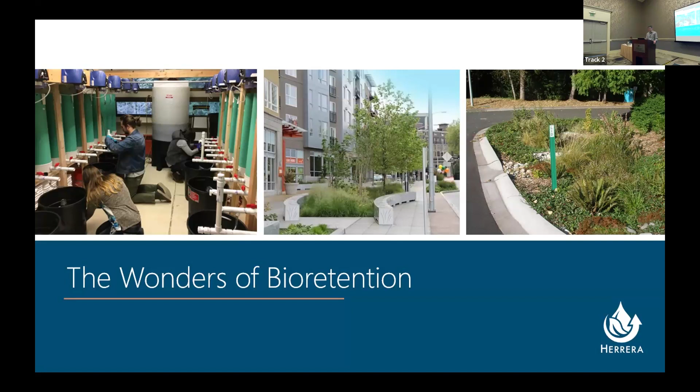We've heard today a lot about how great bioretention is, and we've known this for a while, right? It's very good at treating things like fecal coliform, which is hard to treat with most BMPs. Great for TSS and for zinc, but also cool for placemaking and habitat and traffic calming, all these wonderful things. So of course, our research is focused on bioretention a lot in this region. Turns out it's also really good for the removal of 6PPD-quinone. We've seen that in a study presented by Curtis and by Amy as well. Really exciting that all these data are coming out now, and we're going to get into those data.

That's just really bad luck for coho salmon, right? Designed as a plasticizer for tires. It's an oxidized version of that, just happens to be highly toxic for coho salmon. And just how toxic? We're talking between 40 and 90 nanograms per liter is the LC50, depending on the life stage. Converting to the universal units of Olympic-sized swimming pools, that is 40 drops in 20 Olympic-sized swimming pools kills half the coho in there. It's pretty tough.

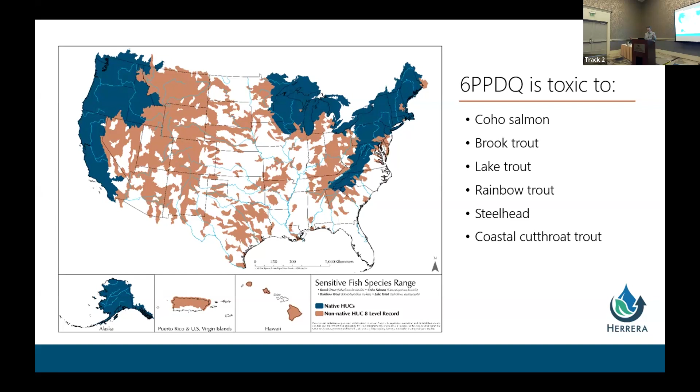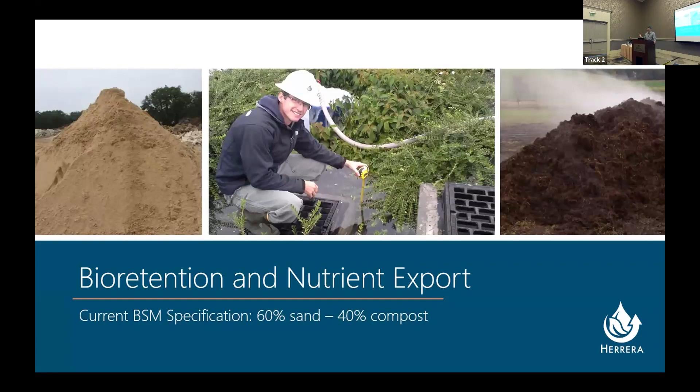Luckily, back to bioretention. Bioretention is pretty good at removing 6PPD-Q. What it's particularly bad at is nutrients, right? That is the standard bioretention soil media spec, 60% sand, 40% compost. We know compost leaches nutrients. That's why the plants love it. But we didn't know the magnitude of this issue until the city of Redmond started looking at it closely because they wanted to treat their stormwater. This is 2013. Everyone wanted to do LID, but they drink their shallow groundwater supply, and wanted to make sure the water is filtered to a high degree before they infiltrated.

But what they documented was with an underdrain in these systems, and I think it's up to 6 bioretention systems full scale in the field that they ended up monitoring, is that there's just a ton of nutrients coming out the underdrain. You know, this soil media spec, 60% sand, 40% compost. If you don't have an underdrain, it's awesome, right? Because you have dispersed nutrients going into groundwater.

That's not a big deal. It won't be too big a loading in any one spot that you'd have to care about it. But when you have an underdrain, you're just routing that straight to a receiving water, right? It's a filter, and especially if it's lined, right? And as we started implementing bioretention across the region with our difficult soils, people started designing more and more fully lined bioretention systems with underdrains. And at that point, it's just a filter.

And really, it's your last chance to get it right at that point. Like you've messed up 100 ways in your basin, you've put in the pavement, you brought in the cars, you brought in the pollution, you routed everything. And now you have 18 inches of soil between you and the stream. It's your last chance to get it right. And so this is what really spawned a bunch of research to get that 18 inches really, really right. We should put some more engineering into that to fix that issue.

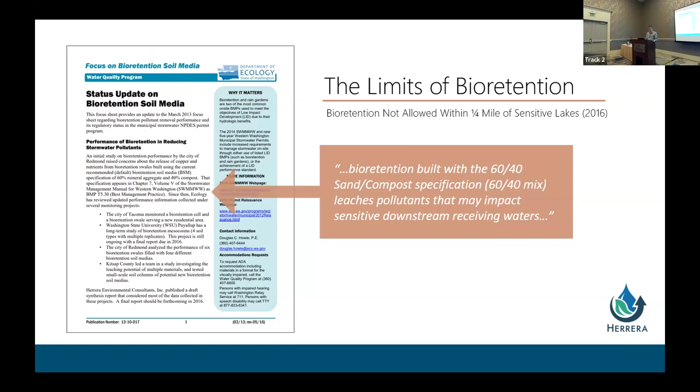When that was documented in Redmond, that amount of nutrient export, Ecology responded, reminding everyone that if you're within a quarter mile of a sensitive receiving water, don't do bioretention. If you have an underdrain, think about it. And then they also looked into funding a number of studies to find an alternate bioretention soil media spec.

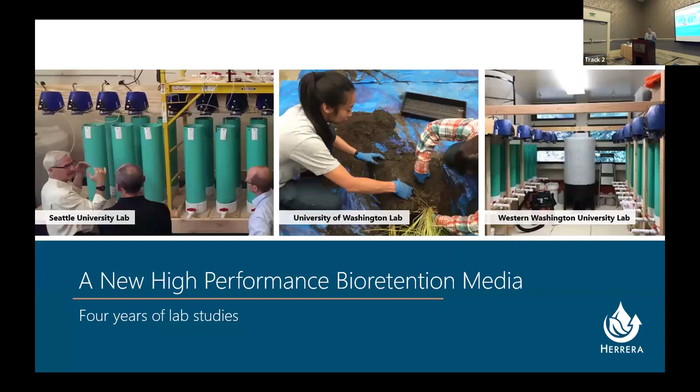And Curtis Hinman led a lot of this work, and he presented some of it today, and the knock-on work from it that's coming up now, but did a lot of studies over, I don't know how many years, Curtis, 10 years, a number of studies, and King County, Kitsap County, a lot of great partners, Seattle University, Western Washington University, University of Washington, all involved, making sure this stuff can grow plants and making sure it can not leach additional pollutants. We got to worry about that. We saw it with the compost.

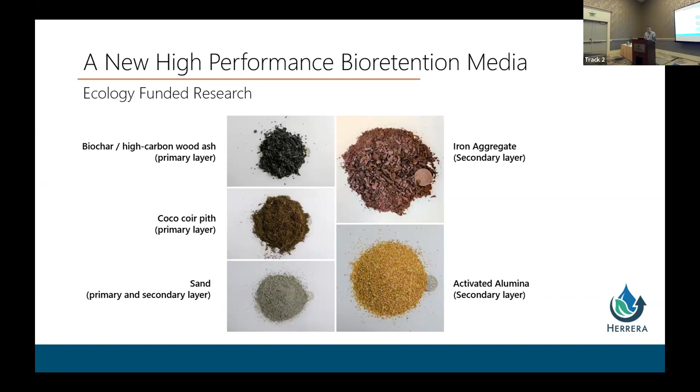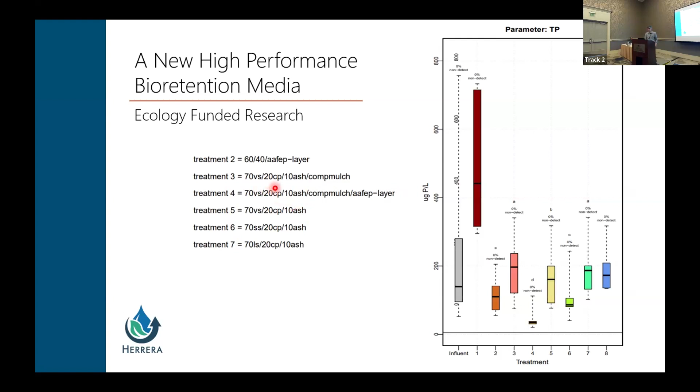Those components. This is some of the data that moved us towards getting this alternate bioretention soil media spec approved, the HPBSM. You can go to Ecology's website and get the spec on that. Meanwhile, in Bellingham, they have a big water body there that they care a lot about when it comes to phosphorus loading. And so, this new spec came out. Now you can build bioretention within a quarter mile of a sensitive receiving water because it doesn't export phosphorus. In fact, it decreases phosphorus a lot. So super exciting. They can start building this stuff along the shores of Lake Whatcom. And that's what the county decided to do.

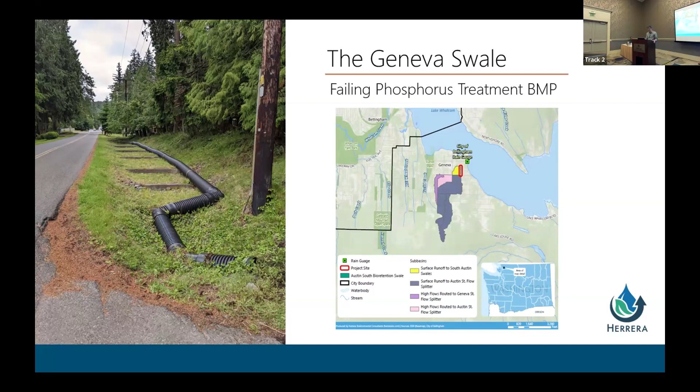It was fouling because there was a lot of baseflow coming in to this system because it's a big pervious basin, so it's like a seasonal stream almost going along the road. And this was causing the media to foul on this existing system. And in fact, they put a big pipe and just routed around the whole thing. So it was offline. And there was an opportunity here to retrofit this thing and improve it. So that's what we did. Those are those problems listed.

And redesigned it as a regional facility using the HPBSM. At this point, this is one of the first installations at scale of this new media in the field. It had been tested and proved in the lab. So we got an SFAP grant, and so again, thanking Ecology for that, to have this rebuilt. Lined it and put in the HPBSM, put in a dosing siphon with flow distribution. That was a pretty cool thing about this.

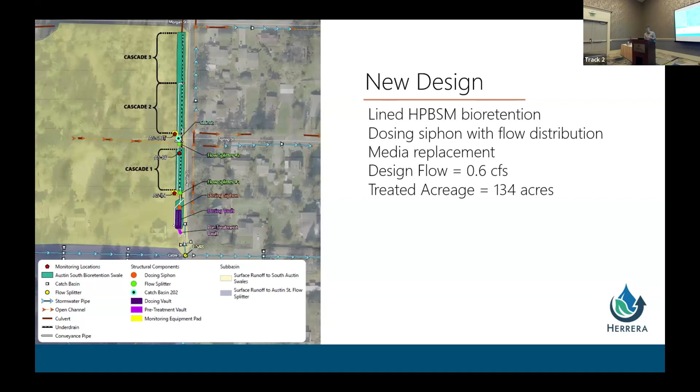Inherent problem with regional facilities is it's always baseflow coming in because you have these big basins. And what do you do with that? If you try to put it through a filter, the filter's wet all the time and bad things happen. If you route it around, you're not treating any of that, right? And there's phosphorus in groundwater, and so they care about treating the groundwater. So our solution for that here was this dosing siphon, and we'll get into that. Design flow is 0.6 CFS, 134 acre basin.

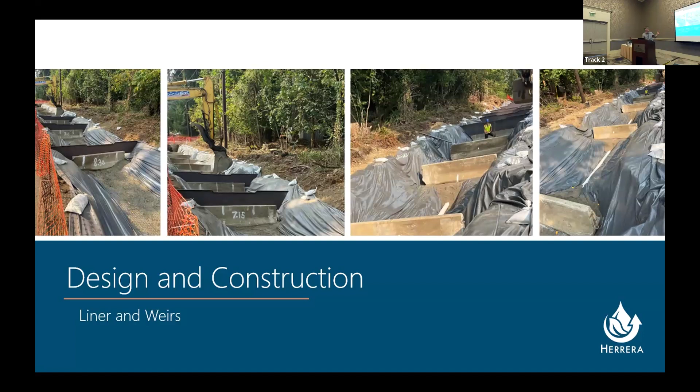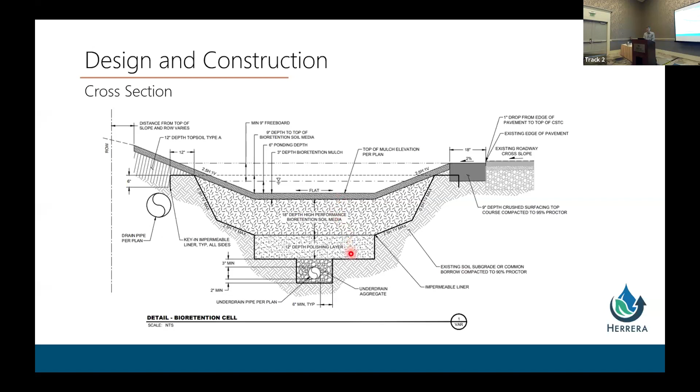This is what it looked like under construction. It was sort of a somewhat steep street. So we put a bunch of check dams in, Jersey barriers that we bolted some metal onto to flatten it out. So a whole bunch of tiers lined the whole thing. There's a cross section, the main media layer, and then the polishing layer underneath, layer cake.

There's a picture of the dosing siphon going in. There's a big old holding tank with the siphon downstream of it. So there you have the big fat pipe on the side, and then the dosing siphon with a blow up of that down. This is used really commonly, apparently, in on-site septic, but not so much in stormwater. First stormwater application of this that I know about. And then a hydrodynamic separator upstream of that. And that was all upstream of the actual cells.

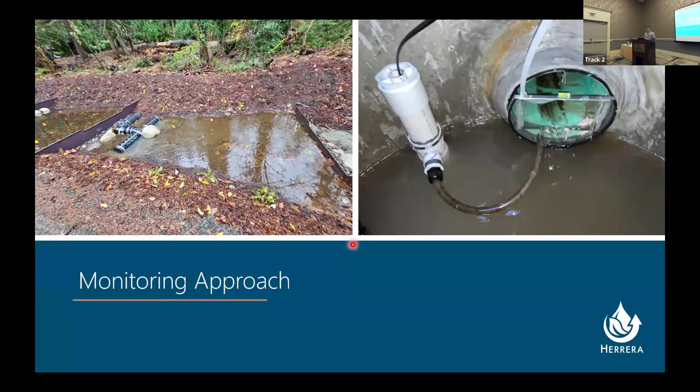So there's a cell filling up with water on the left. That's what it looks like. The water pulses into this thing and sort of fills up and breathes. Water goes in and down. And we monitored it full sort of TAPE style monitoring, automated samplers, weirs, pressure transducers, telemetry, all the intelligence baked in to get the data. So let's get into that.

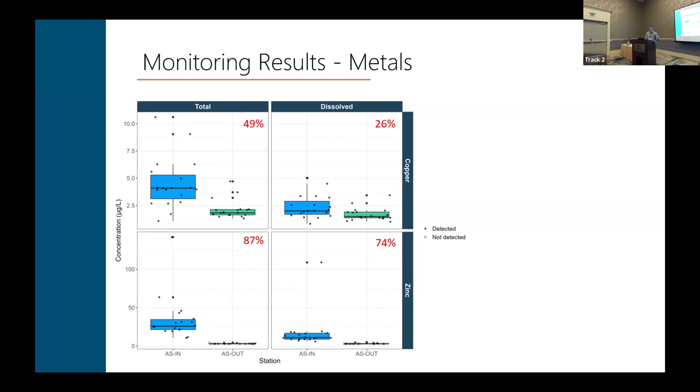The water was just coming out crystal clear, and you can see it completely wiping zinc out. Those are the bottom rows, 87% and 74% reduction. Again, when the influent concentrations are low. So great metals performance.

While that was going on, Curtis and Chelsea were doing their study in the lab, right? And seeing that these same media, the HPBSM, that's what we have in the field here, as well as looking at the 60/40 in these columns, we're doing really good at removing 6PPD-Q. Now we wanted to test that out in the field. So Chelsea said, hey, I heard you're doing that Whatcom County project. Can King County jump on and look at PFAS and 6PPD-Q as well, since you're collecting samples? And we said, sure, let's make it a party. And so we did that.

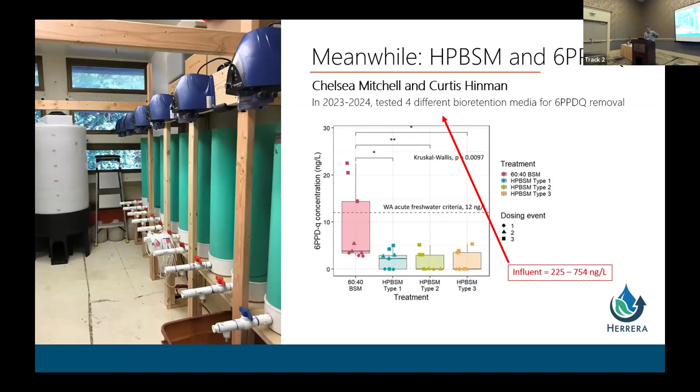Curtis, you already presented this slide, right? Yeah, I think so. So I don't need to rehash what he presented, but it did really well. The HPBSM for removals, the influent concentrations were really high, and these are all the effluent concentrations from the columns. So we had a good idea that the HPBSM would do well in the field. I was just surprised to see how well it would.

So I've been doing this for 20 years and probably monitored over 100 different stormwater treatment systems with a similar approach. And you don't see this. You don't see influent concentrations get reduced with every effluent concentration being non-detect when the detection limit is 1 nanogram per liter. And so that was really surprising. This thing wipes out 6PPD-Q. So that's really lucky. Happy to see those results.

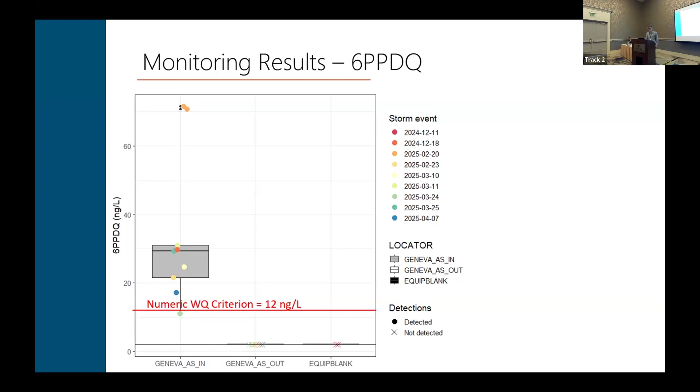And I think Amy showed a similar slide with almost the same results, like the one she's doing in Spokane. It's almost all non-detect at the outlet. That's just really great to see that in 2 different locations. Good confirmation. Oh, just a reference line there. That's that 12 nanograms per liter. We're below that at the effluent, which is great.

Now this is cool. We haven't done much PFAS in stormwater in this region yet. We're a little behind some other regions, and really a lot of the PFAS data and analysis has been done at contaminated sites. And so you see some performance data with really high influent concentrations, but that's not so applicable to what we see in stormwater around here. So I think Brandon Steeds, who was here earlier, is giving a presentation after this one on more PFAS in stormwater, but excited to see these data here.

That's a lot, and the screen's tiny up here. I don't know how many PFAS species there are. I think it's like 20,000. It's a really high number. So we analyzed like 17 of them. The ones most commonly talked about are PFOS and PFOA. So I'm highlighting those down there.

You can see, unlike the other numbers, we didn't do as well for PFAS. Influent concentrations, again, were really low at the inlet, so I didn't expect much of a reduction. But you know, it was sort of same in, same out, if not a little higher at the outlet than at the inlet. So some sort of minimal leaching of PFAS potentially going on from something in the system, maybe the liner, I don't know, but not at concentrations you would particularly care about. Like the MCL for drinking water is 4, and that's really low. I heard they might actually change that, and it's been in the news lately.

So yeah, you see that MCL line on our data, but when you look at the numeric water quality criteria for Washington, the chronic criteria, they're way off the chart, orders of magnitude higher. So we're talking about environmental concentrations that are not super relevant here, but still interesting to see PFAS in stormwater and treatment of it. Want to do more of this, maybe at a dirtier site. We need to do this at a dirtier site, maybe at the Ship Canal or something. That was all water quality.

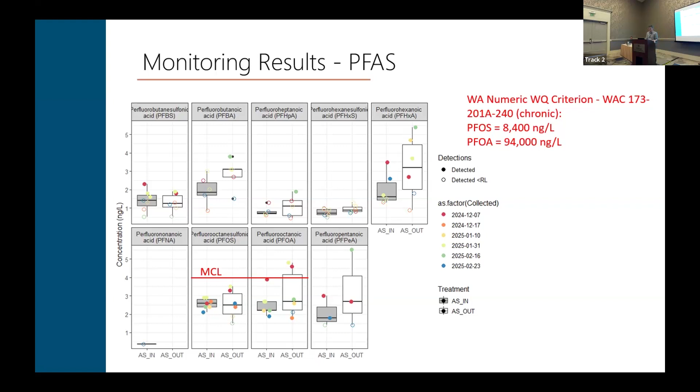I haven't gotten to. Okay. Oh, yeah. Oh, yeah, so I told you this thing was pumped, right? It's really, thank you.

In the end, when we do scale that up, what we were able to treat was over the course of one water year. We've gone beyond one water year now, but just for water year 2024, 5.1 million gallons were treated in this thing. And of course, we have to convert to Olympic-sized swimming pools. We got 8 of them with this thing in one water year, with all that amazing treatment going on that we showed with the box plots. And a really fun looking hydrograph, which is hard to sample. Like poor Skylar, he was out there trying to grab samples, and the water would just disappear and you'd have to wait an hour for the next pulse to come.

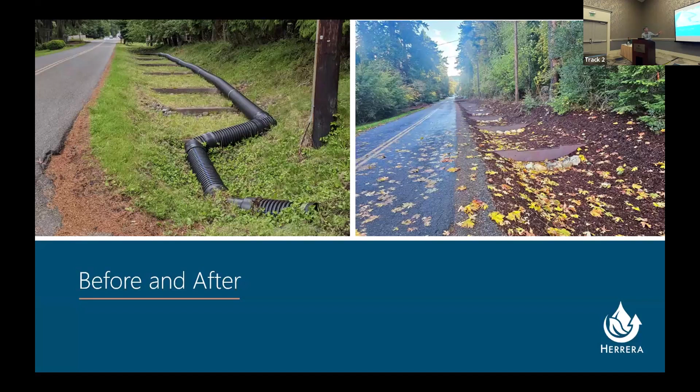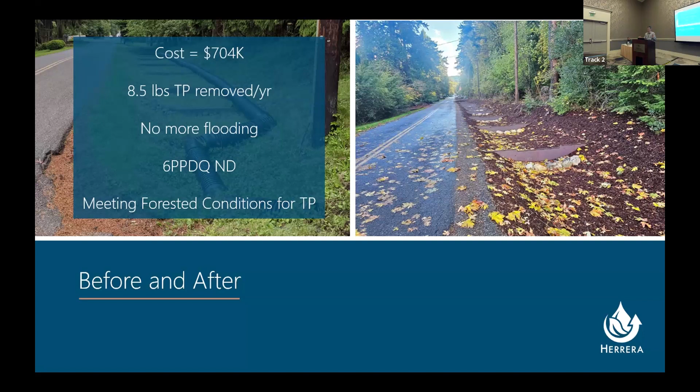So here's what it looked like before and after. And some conclusions is that the thing cost $700,000 to rebuild. It removes about 8.5 pounds of total phosphorus per year by our calculations right now. Again, we haven't written the final report yet. This is early stuff. There's no more basement flooding. The 6PPD-Q is completely wiped out, which was great to see. And then it's meeting forested conditions for total phosphorus, which is really great because that's the objective in the region with the TMDL, is to get developed neighborhoods to sort of act like forested areas when it comes to phosphorus loading, and it's able to do that.

So I just want to say thank you to all these partners. I didn't just cover one study there. I think I covered 8 studies, and so a lot of people were involved through the years. But for Whatcom County, Cody Swan and Craig Olison were leading this whole thing. Our Herrera team, our engineers, Chris and Neil and Colleen. Skylar, I already mentioned him. He was out there in the field all the time collecting these data, and Lacey and Nick and Sam. The labs Exact, and then ARI and King County Environmental Labs. They were all great to work with. And of course, Ecology funded almost all these studies I presented. So it would be a long list, but Morgan, Shelby, Tanya Williams, Chelsea, Doug, and of course, the King County folks, Janae and Chelsea, and finally, of course, Curtis. So thanks everyone who was involved in all these studies. And with that, I will take questions.

This was a Chris Webb invention. He's done a lot of on-site septic stuff and used to do this. There's just a big old pipe on its side here, and it slowly fills up with water because the siphon's closed. And then once it comes up, there's a float in there, and it comes up and it breaks the siphon and it starts sucking the water down. And because it's a siphon, it can suck all the water down to the bottom. And so it pulses all the water out, and then the siphon closes because the float comes back down. And then it fills back up, and it just sort of pulses like that. Sucking all that baseflow. Yeah. To dry out. While the thing is filling up, the media downstream is drying out, because it takes a while to fill up, and then it hits it all out. And it's nice because it doesn't need a SCADA system to run it or anything. It's just passive.

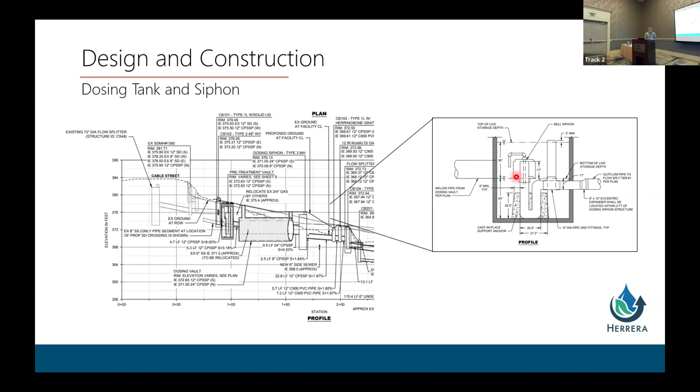Good question. Not for this part of it, but there were implications downstream because the water comes out really fast. And so these cells get hit with water pretty fast. And so there was some erosion that was occurring. And so the county's been working on trying to figure out ways to dissipate the energy even more and prevent the mulch floating, which is always an issue with bioretention. It's even more of an issue when you have a current, and so I think there's some learning there about how to do downstream design to make sure things don't get blown out. So they're putting down erosion control stuff now out there.